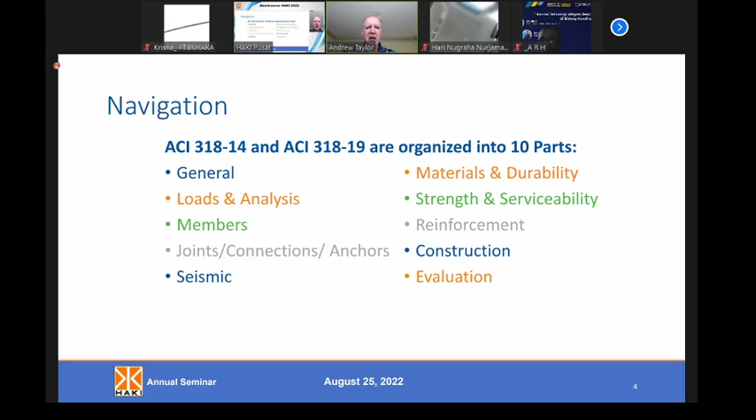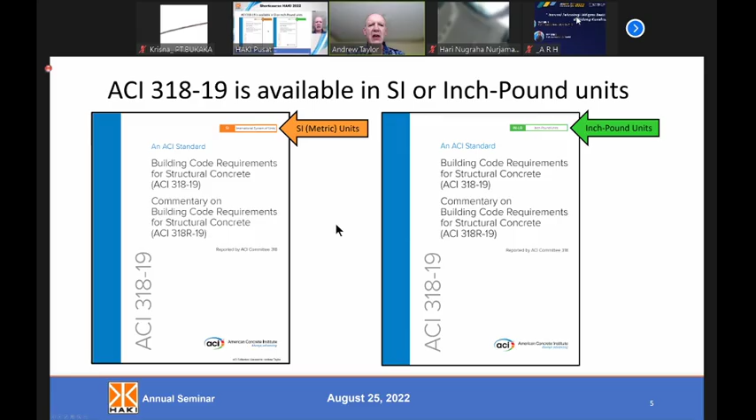Now, I want to point out also that there are several editions of the code available, including one in SI units, which is the one that I'm assuming that you would be using. The one on the right is the inch-pound units version, the one that I use most. You can see the difference here is shown in the upper right corner, inch pounds versus SI. There are also editions of the code in Spanish, Chinese, and I believe one or two other languages. But most importantly, the slides that I'm showing you today are mainly listed in the American units or inch-pound units.

However, I have attempted to translate those units at key points within this presentation into SI units. For instance, I've converted kilopounds per square inch, or KSI, into megapascals. I've converted forces into newtons, and so on. So hopefully you'll be able to follow along in familiar units. And I've listed also here, just for your convenience, the conversion factors if you wish to convert anything from the inch-pound version to the SI version.

One factor I find very interesting is the very last one, pounds per square inch times 0.006895 is megapascals. And I wanted to note that that is the famous number associated with the secret agent James Bond, 0.007. So remember that number if you're ever converting from pounds per square inch to megapascals.

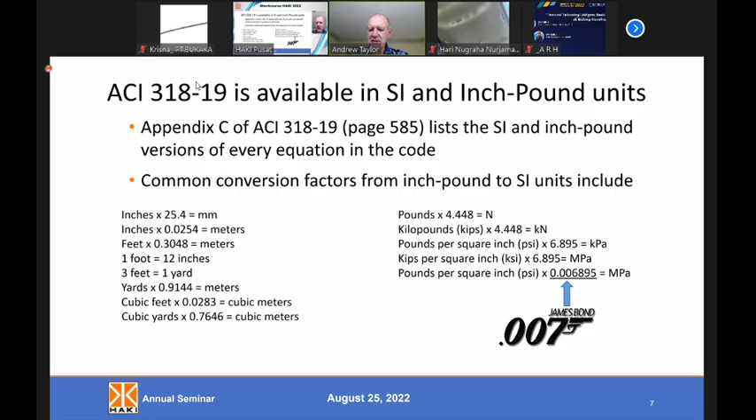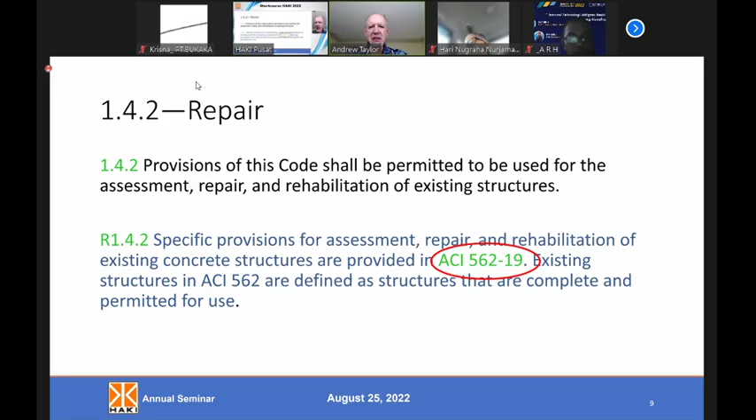All right, let's get started on the actual contents of the code. When it comes to repairing existing buildings, those that have been damaged or deteriorated, the code refers to the document ACI 562, which is a repair and rehabilitation code. It's a very comprehensive and helpful code. So if you are encountering a situation where you need to repair an existing structure, please refer to that code. But we also say in ACI 318 that the provisions for new construction or new design can be used when repairing an existing structure. So if you're using ACI 562, you will also refer back to ACI 318, which is what we're talking about today.

So I'll skip way to the end of the code. The very last chapter is Chapter 27, and its topic is the strength evaluation of existing structures. This applies when a structure is completed and hasn't been occupied yet. However, there may be some question about the strength of the structure, and this often happens if, for instance, a concrete

Test, strength test, comes in that's too low. So it may be necessary in some cases to evaluate the strength of an existing structure in order to certify it for occupancy. Now, what is generally well understood by engineers is to look at the structure in question, if perhaps the concrete strength is lower than expected, and perform calculations to evaluate that structure. I think many of us understand how to do that and to see if the lower strength is perhaps acceptable.

But what is not well understood generally is the procedure for actually performing a load test on the structure in the field. This load can be applied in a number of different ways: with heavy blocks, with tanks of water, with hydraulic jacks, a number of ways. But there are two test procedures described in Chapter 27.

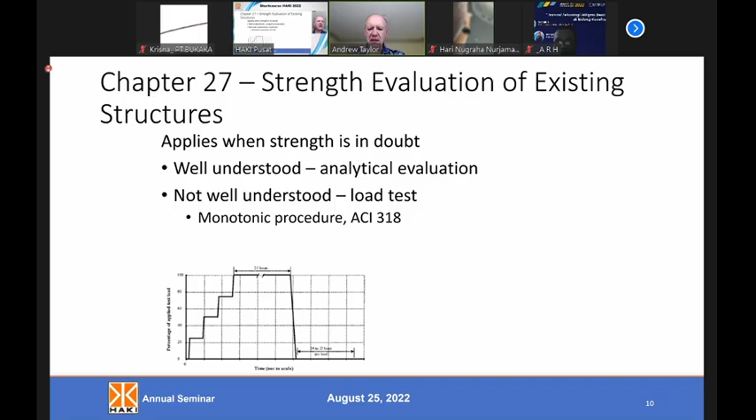All right, now we're going to go back to some of the more fundamental aspects of design that are covered in ACI 318. I want to point out something which is actually not new in the code, but it's very important, so I want to bring it up. In previous years, previous editions of the ACI code, let's say ACI 318-08,

2008, the loads in that code were based on a US document called ASCE 7-05. In that code, the wind loads specified in ASCE 7-05 are not factored, meaning when one is creating the load combinations for design, you have to multiply the wind load from ASCE 7 by 1.6. So it's a factored load in that case.

Now, what has happened since then, not new, but in the last 3 editions of the ASCE 7 load document, is that document has changed from service level loads to strength level loads. And the load factor used in load combinations is 1.0. So the wind loads as presented in ASCE 7 now are already factored. So it's a very important distinction to be aware of for wind loading, because the difference is a factor of 60% for wind loads.

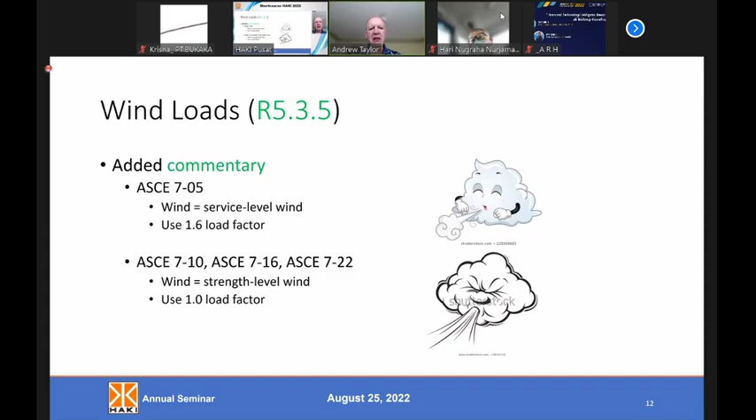So if you follow current practice and use factored loads in your design, whether they're from ASCE 7 or some other document, as long as they are considered strength level wind loads, then the load combinations in ACI 318 are correct. Okay, just a very important point about wind loading.

Another aspect of concrete design that I'm involved with quite a lot is the vibration of floors, either for sensitive occupancies like medical MRI machines or electron microscopes, or for human comfort, such as in apartment buildings, offices, and so on, where occasionally floor vibrations can be a problem.

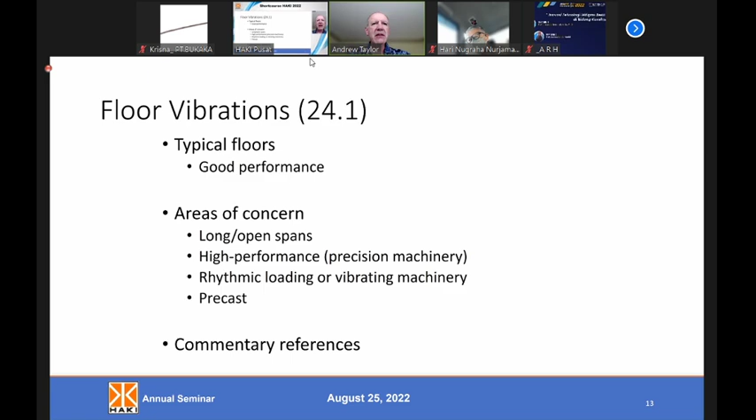Now, generally, concrete floors perform quite well from a vibration standpoint, and typically we don't have issues with them. However, there are cases, for instance, long spans, very high precision machinery, or where there's a rhythmic loading, such as an exercise studio or vibrating machinery, and sometimes precast concrete elements can exhibit vibration that is not acceptable in a particular situation. So in the commentary to ACI 318, there are references for procedures and methods that can be used to evaluate floor vibrations. I want to point that out because occasionally that is something that just about every consulting engineer needs to deal with.

All right, now we're going to talk about types of members, meaning slabs, beams, walls, and so on. The first type of member we're going to talk about is one-way slabs. So these are slabs that flex in one direction rather than in two directions. And of course, they're the simplest type of slab.

With this type of slab, the one-way bending slab, we are concerned with all structural systems, but in particular about the potential for collapse under extreme loads that we don't even consider in design. We would like to preserve the structural integrity of these slabs so that they remain in place. They may be severely damaged, but they will have a good chance of not collapsing, because collapse of one element causes loads on adjacent elements. So we want to preserve this structure in its original configuration, even though it may be severely damaged.

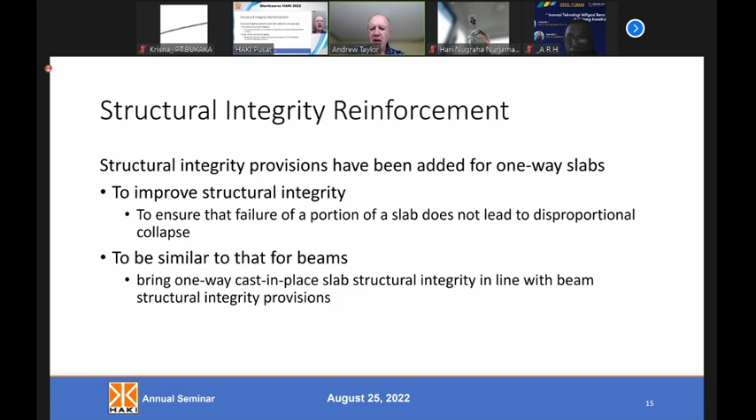So there are new provisions in the ACI 318 code to provide very minimal, inexpensive, continuous reinforcement in one-way slabs, to provide a high degree of confidence that they will remain in place if subjected to some very extreme loading not anticipated in the original design loads. So that's what's new about one-way slabs. Not much has changed, except for those new provisions for integrity reinforcement.

Regarding two-way slabs, you may be interested to see that two of the methods that have been in the code for a very long time - maybe 50 to 80 years - the direct design method and the equivalent frame method from ACI 318.14, have been removed. This is not because there's anything wrong with those methods; they are completely valid. It's just that they are not used very often. Most of the time they're used primarily for preliminary sizing, but not for final design. We looked at those, and we are trying to save paper when we print the code.

So what we did was take those methods out, but we left references in the code that say, for instance in section 8.2.1, that the direct design method or the equivalent frame method, which have been removed, are still valid - you just have to refer back to ACI 318.14 for the rules on how to use them. They aren't eliminated; they are just not printed in the current edition of the code, because in practice they weren't being used very often, but there's nothing wrong with them. That same provision appears in section 6.2.4.1, so those methods are still available.

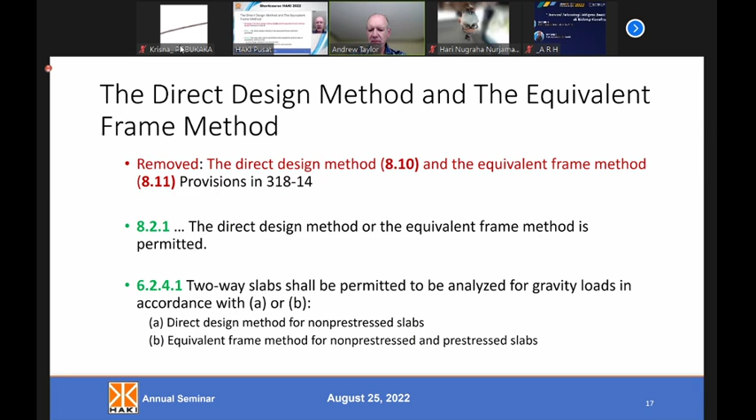Here's a very important one, especially if you're doing commercial design of multi-story buildings. We all know that mechanical engineers want to put holes at the worst possible locations in the structures we design - right next to columns. They want to put holes through the slabs where pipes and conduits come down next to the columns. So there are rules in ACI 318 about how to evaluate the punching shear strength of a slab intersecting a column. A very common form of construction is flat slabs without any drop panels or shear caps, just a flat slab intersecting a column.

In order to evaluate punching shear strength, we need to account for those openings. In the illustrations, it describes how this is done for various situations and shapes of holes, and how to evaluate the green dashed line, which is the perimeter of the punching shear zone.

A big change is that previously in ACI 318.14, the distance from the column within which an opening could be located without affecting the punching shear strength of the column was 10 times H, where H is the thickness of the slab. That created more situations where it was harder to design for openings like those shown. That has been revised to 4H, so it's much smaller - openings can be no closer than 4H from the column and they won't count against the punching shear strength. This is a significant change, and I think it makes life easier for engineers designing flat plate structures.

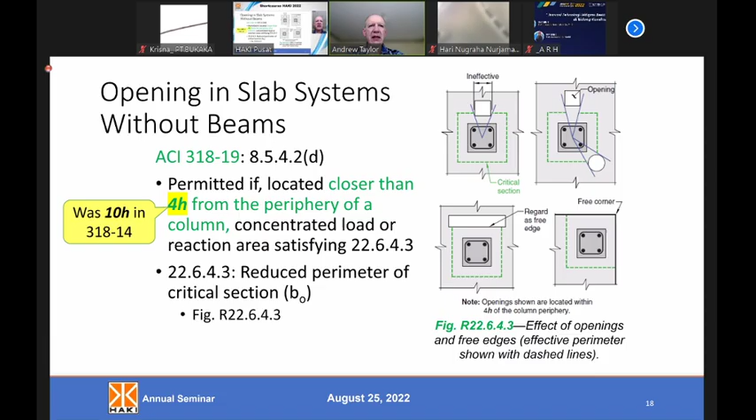The crack did not intersect the top reinforcement that was there partially for preventing punching shear. But this only occurs under the ACI design rules for very thick slabs, and so the rules have been changed slightly to prevent this situation occurring.

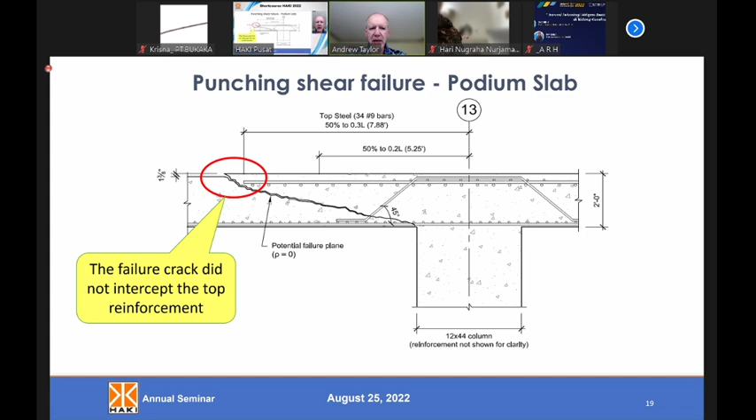So this is a new rule. If you're dealing with a very thick slab and concerned about punching shear, make sure you evaluate the extension of those bars and that they meet the 5D extension rule.

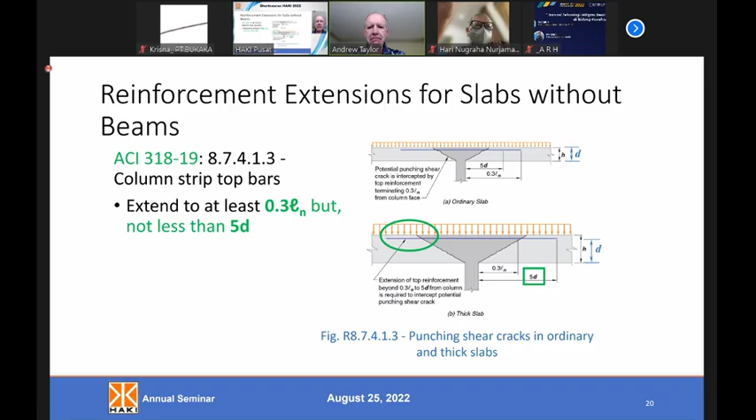Okay, now post-tensioning. This is a method that is widely used, particularly in the Western United States, not as much in the Eastern US. I'm sure that in your career you will encounter it - you may commonly work with it, or it may be less common in the kind of work you do. But there are a few changes there.

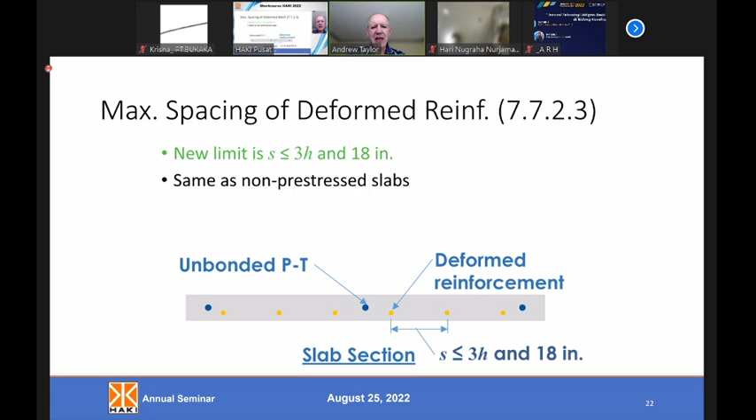There is a new requirement for the spacing of non-pre-stressed reinforcement - the normal deformed bars that are in the slab. That spacing, which is not the spacing of the post-tensioning tendon but of the normal deformed reinforcement, has been reduced and is now the same as for non-pre-stressed or normally reinforced slabs. So things have been simplified a little - the maximum spacing of deformed bars in pre-stressed slabs is now the same as for non-pre-stressed slabs.

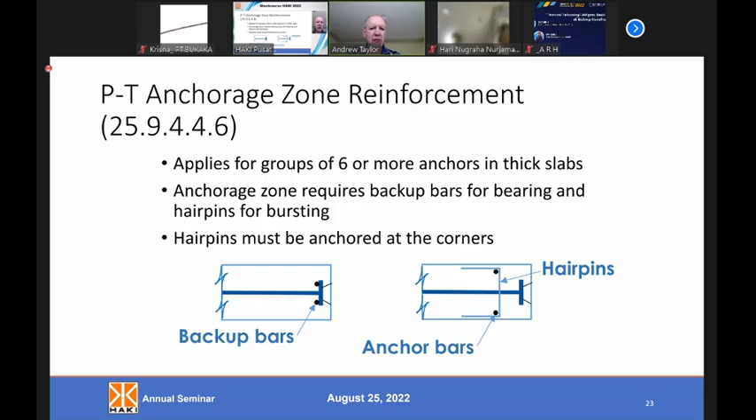Now why are we requiring these bars? It's been found that the slab can split under the pressure or force of the post-tensioning tendons if there's insufficient reinforcement to inhibit this splitting and bursting of the edge of the slab. So these are new rules. If you're involved with this kind of construction, I'd recommend you review the rules for these backup bars, anchor bars, and hairpin bars.

Okay, now walls. What I'll be talking about here are not seismic shear walls, but non-seismic walls, and there's a few changes. One is that cantilever retaining walls - there's a few illustrations of loads on cantilevered earth retaining walls - are now moved into chapter 13, or designed according to chapter 13. Now you might wonder why - they're a wall, they were in the wall chapter, chapter 11, and now they've been referred to chapter 13, foundations.

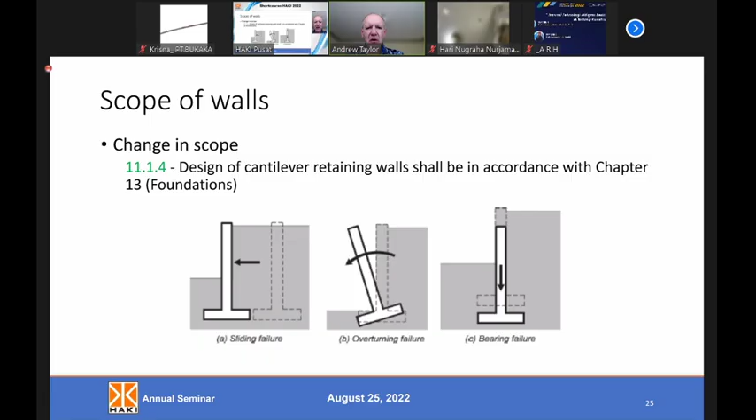What we found is that in 318-14, there was some confusion about the reinforcement of retaining walls.

Specifically, there were rules about a portion of the reinforcement that had to be on one face of the wall and the portion that had to be on the other. They weren't very clear, they weren't very well understood. The definition of interior face and exterior face was not very clear. And we found that there really was not a strong technical basis for the 1/2, 2/3 rule.

So now the rule is that there are 2 layers of bars near each face. It doesn't specify what the proportions are, as long as the calculations work for strength. There is one exception for walls greater than 10 inches thick, about 250 millimeters, and that is for single-story basement walls. Generally these are found, at least in the US, in residences, so 1 story below ground. Those do not require 2 layers of reinforcement, but all other walls greater than 250 millimeters require 2 layers of reinforcement.

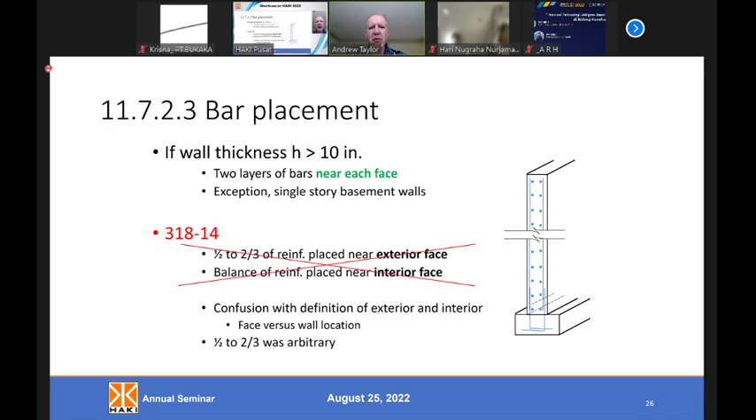Now let's talk about foundations. There are some really significant changes about foundations that I want to go over.

As I mentioned, we moved the cantilevering wall provisions or design rules into the foundations chapter, and there have been many changes in the sections on the design of deep foundations. So what are deep foundations? Those are piles, drilled piers, drilled shafts, cased shafts, both cast in place and driven piles. They're all types of foundations used in soft soil conditions. I'll describe why those have changed in a moment. But I also want to note there have been small changes in the minimum concrete strength required for different types of foundations, and also a change in the concrete cover requirement, meaning the thickness of concrete covering the reinforcement.

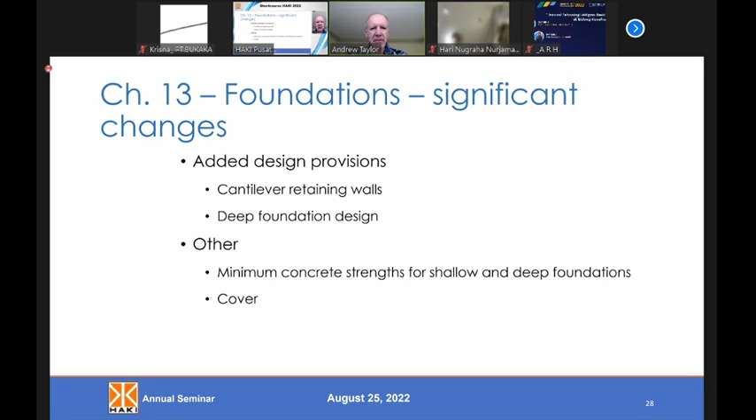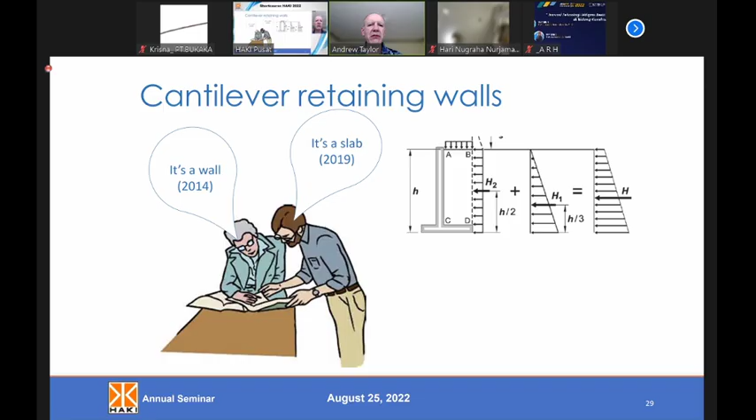So first of all, cantilever retaining walls. In 2014, the code described cantilever retaining walls as walls and said they should be designed as walls. In 2019, we had a philosophical change so that these cantilever retaining walls are actually designed according to the rules for a concrete slab. We believe they perform better, are more economical, and it makes more sense to design them according to the rules for concrete slabs rather than walls.

I won't go into all the details, but if you look on this chart, you will see that if we design cantilever retaining walls as a slab, as a one-way slab, then the rules for design get much simpler. In general, that results in a more economical design because it's a little more reinforcement, but it's the same in both the vertical and horizontal directions, so it's much easier to put into place. It also avoids having the wrong reinforcement put vertically versus horizontal in the field. They're the same. So this chart outlines the differences between 318-14 and 19.

If you're interested in that, you can refer to the sections shown there. I think you'll find it is an improvement over the last edition of the code.

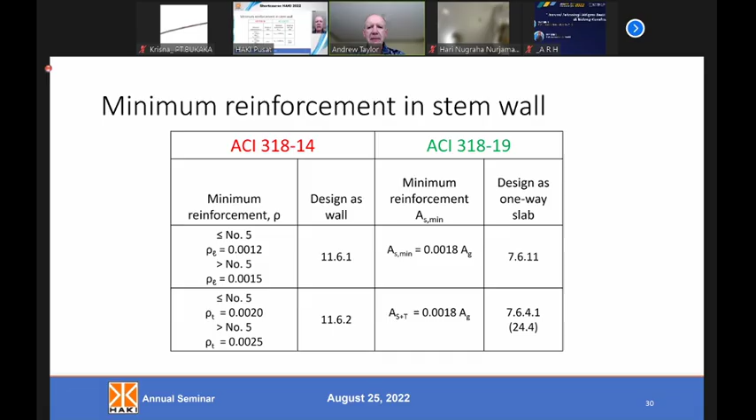Now, regarding deep foundations, I said I would explain why there have been changes in all these different types of foundation provisions. The ACI code mainly addresses deep foundation design for earthquake-resistant structures. In the US, earthquake-resistant structures are designed according to a seismic design category, SDC, with category A being virtually no earthquake considerations for design, and categories D, E, and F being the most severe earthquake conditions for design. ACI 318 addresses deep foundation design for seismic conditions in these higher seismic zones, or design categories C, D, E, and F.

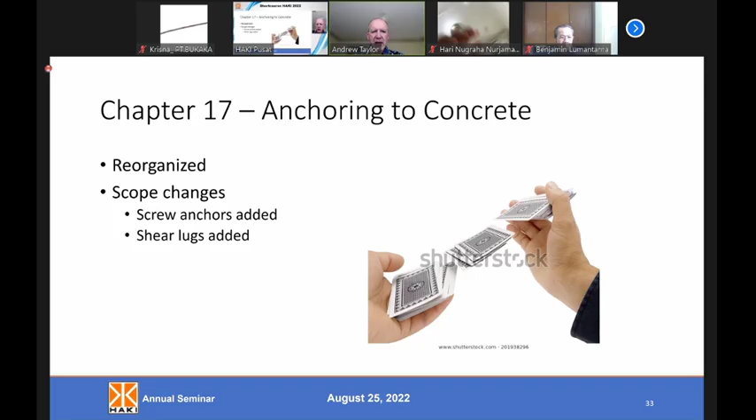So now there are rules in ACI 318 about how to design shear lugs. We've kind of gained more confidence in how to design and what the shear capacity of column base plates with shear lugs are.

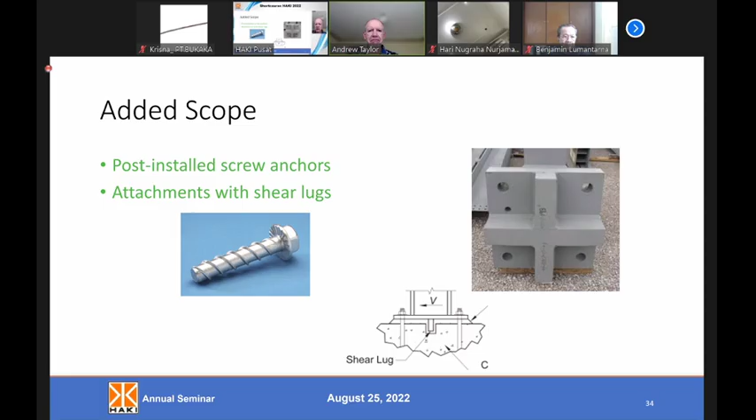Okay, now seismic, a very important topic. I have been involved in seismic design for more than 30 years now, and it never gets old. It's always changing. There's always new things to discover.

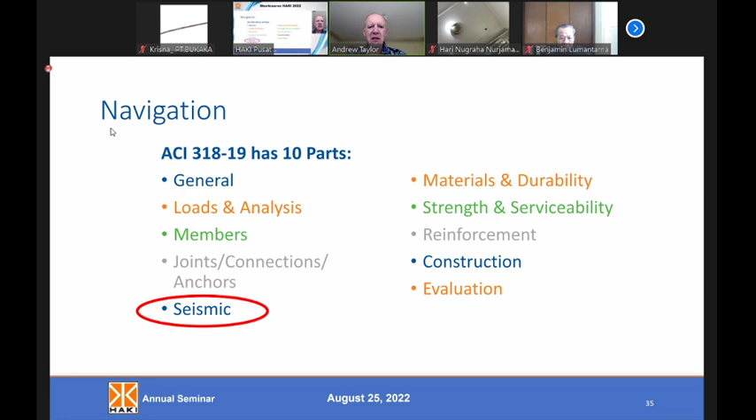In the 318-19 code, we have made some changes in the seismic design provisions. If you would like a complete and very detailed tour of all of these seismic updates, I suggest you find 2 articles in Concrete International. They were published last year in March and April. S.K. Ghosh and I wrote those together. They cover just about every detailed aspect of the changes to seismic design that occurred in the 2019 code. So I invite you to look at those, but I'm going to point out some of the changes that are most important in this presentation.

Perhaps one of the biggest and most important changes is that higher strength reinforcement is now permitted in seismic design. Previously, we had grade 60 reinforcement, which is 420 megapascal reinforcement, permitted for ductile seismic design, for flexural elements, and for shear.

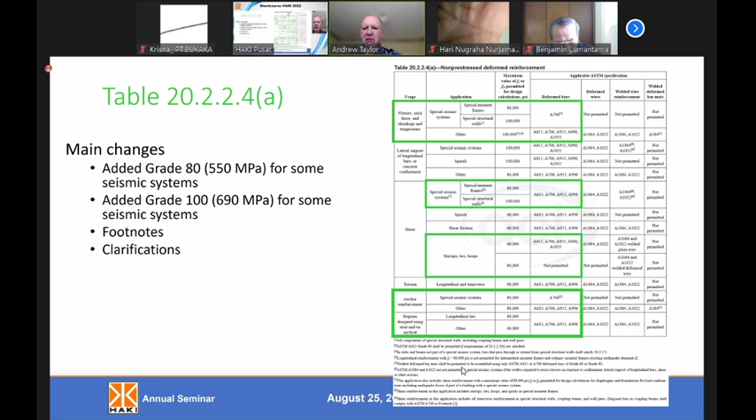Now let's talk about seismic design of some specific earthquake force resisting systems. A lot of the changes have to do with the availability now of higher strength reinforcement for design. And what I've done is on these next few slides, I've shown where in the green box, where the new availability of steel grades is permitting you to use a different type of bar. So new in 2019 is using grade 80 or 550 megapascal reinforcement, in this case for flexural reinforcements in special moment frame beams. So anything in green on these slides is new in 2019.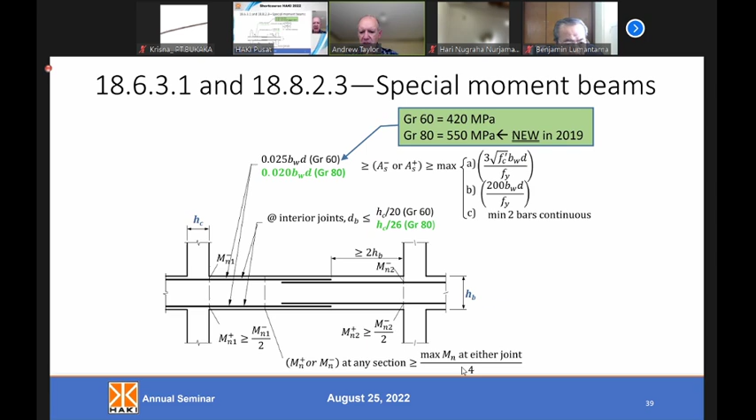So I won't go into the detail here, but as you can see, as I go to some of these other illustrations, you see that for instance, the shear reinforcement now can be a higher grade, but also notice that the spacing of the reinforcement is reduced for the shear reinforcement to a smaller spacing, and there's a couple technical reasons for that, but it mainly has to do with the tendency of bars, especially in seismic applications, to buckle laterally between the points of support, which in this case are the shear reinforcement, the hoops, in special moment frame beams.

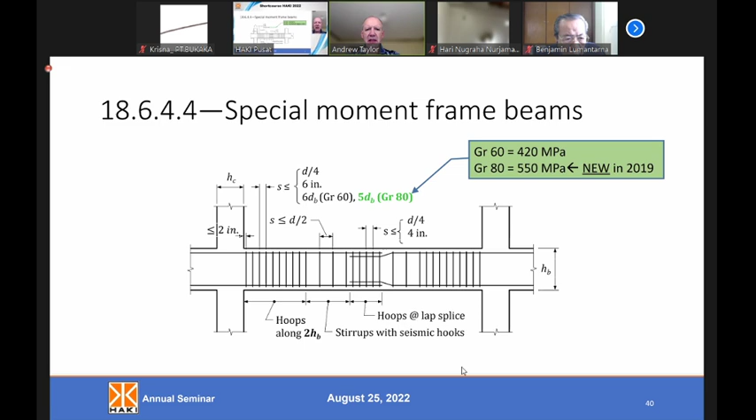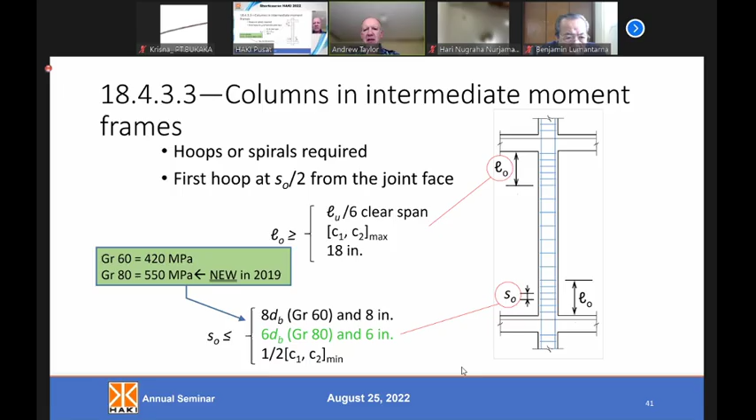So just be aware, if you're using the higher grade reinforcement in certain applications, sometimes the spacing has changed, decreased slightly. We see here that, again, there's a spacing change if you're using 550 megapascal hoops in intermediate moment frames in this example. If we look then at columns in special moment frames, again, you can use the higher grade reinforcement, but the spacing has changed, has decreased slightly for the higher grade.

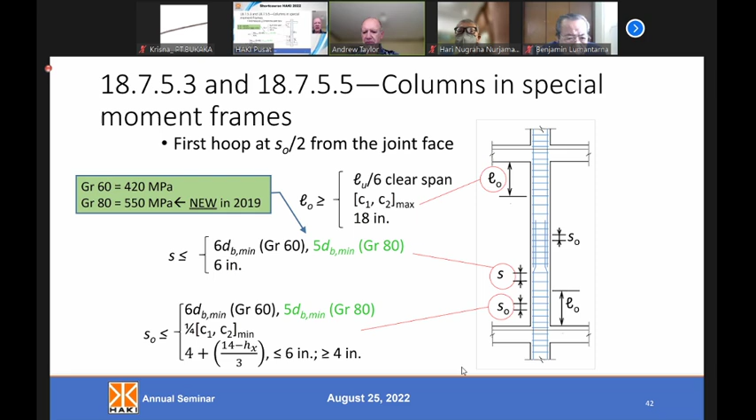And then we get to special structural walls. Now, this is probably where the most significant changes have occurred, and I'll try to cover the main points so that you understand what has changed in 2019 with special structural concrete shear walls for seismic. Here is a brief summary of the changes in shear walls, special structural walls, and I'll describe each of these briefly, but in subsequent slides.

But the cutoff or the stopping of longitudinal bars, the rules have changed, I think, for the better. Reinforcement ratios at the ends of the walls have been changed somewhat. It probably won't affect in practice too much. It won't affect too many buildings. The shear demand is a very significant change that I'll be spending some time on. That is, the shear load that is required to be resisted by the walls has changed. There is a new drift capacity check, which again, probably not influence the design of walls very much.

There are very significant changes in the detailing requirements, the hoops and cross ties in the special boundary elements at the ends of special walls. And there is a new section on ductile coupled walls. So I'll go through all of these briefly in the following slides.

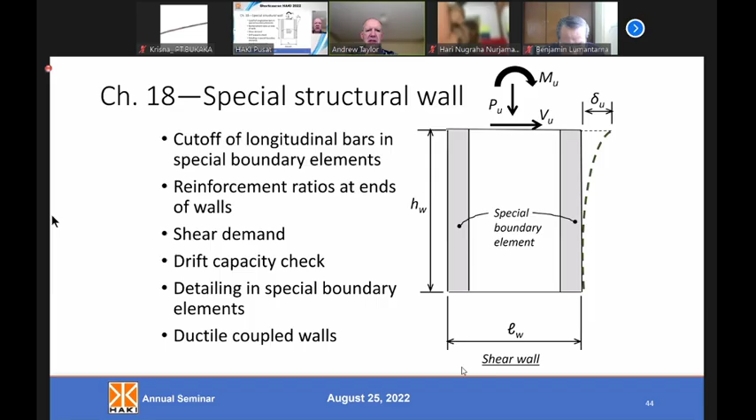So previously in 2014, if you had a vertical bar in a shear wall, and you got to a certain height in the building where you no longer needed that bar because the flexural demands have decreased as you go higher in the building, and you want to stop that bar, you had to, under the old rules, extend that bar 0.8 times the horizontal length of the wall. So if you had, for example, a 10-meter long wall, which is fairly common in the US on the West Coast, if your shear wall was 10 meters wide this way, and you needed to stop a bar, you couldn't stop it where you no longer needed it.

You needed to extend it 8 meters beyond that point. 8 meters is more than, or about 2 stories typically. So what was required was to extend these bars 2 stories above where they're needed, which in some cases is really excessive, and there wasn't a really solid technical reason to do that.

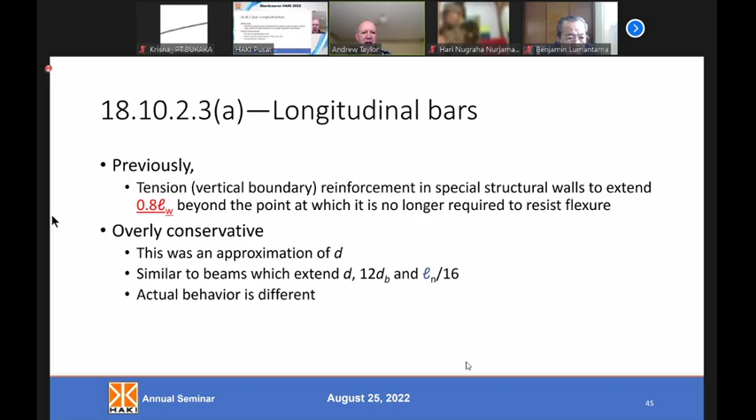So we had a lot of debate about that provision, and the new rule is illustrated here. Once you find the point at which a bar is no longer needed, you need to extend it at least 12 feet, or a little less than 4 meters, about 3.8 meters above the point that it's last needed, which is much, much easier to build.

However, if that 3.8 meter extension went above the next floor, then you only need to go L sub D, one tension development length above the next floor, so it could be significantly shorter than 12 feet. This is a big change from the 0.8 times the length of the wall extension that was required, and it took a lot of debate, discussion and voting to get this change through.

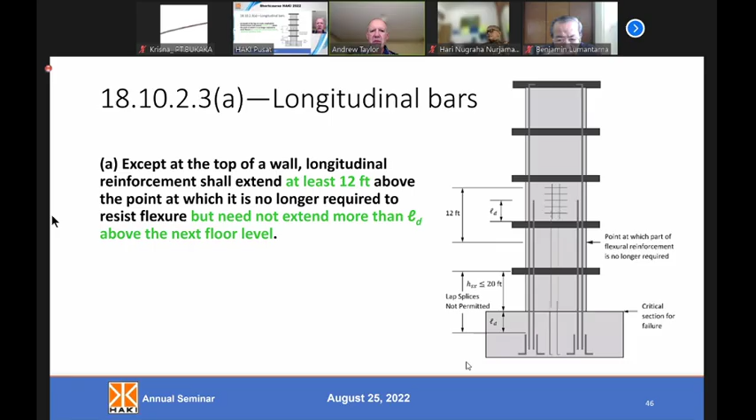Okay, moving on to a different topic about walls. There is a new provision, which I have to say is a little bit controversial, regarding the location of lap splices. Lap splices are where 2 bars are joined by overlapping them like this.

Unfortunately, lap splices at that location are the simplest way to construct those walls. Obviously, you have short bars coming out of the foundation, and then you continue to build the wall above, and that's the easiest way to do it.

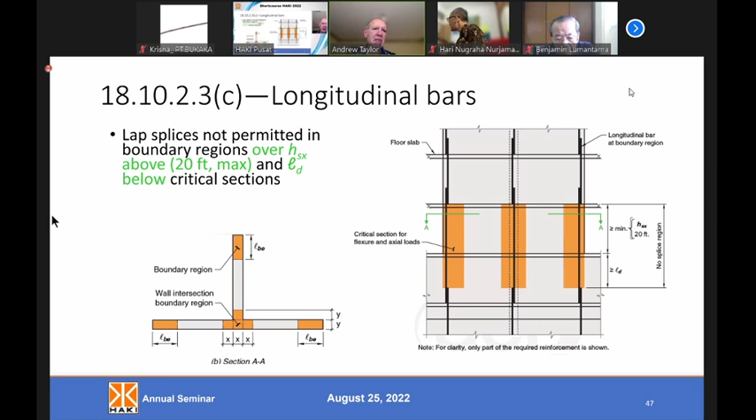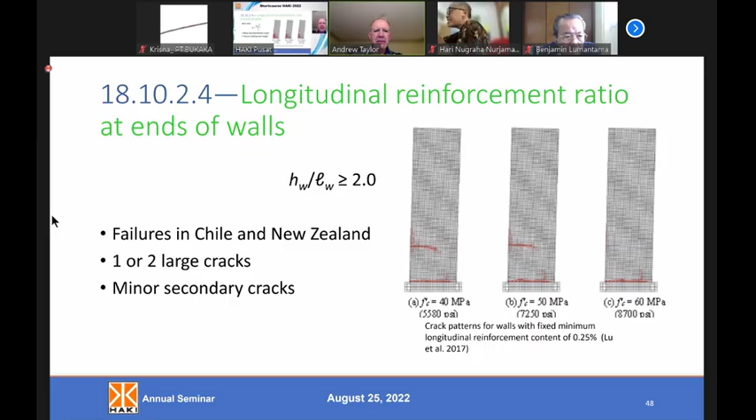So by adding a little more reinforcement in the ends of the walls, we end up with a situation as illustrated here, where there are many small horizontal cracks. The inelastic strain in the vertical or longitudinal bars is distributed well over the height of the wall, and there's less possibility of a strain concentration and a fracture. So immediately you're wondering, well, how much more reinforcement do I need to put in the ends of the walls? There's almost no room in there as it is under the current ACI provisions. Well, this new ratio is 6 times the square root of F prime C over Fy.

I think it's actually different for SI units. This is in inch-pound units. I forgot to mention, in both the SI and inch-pound units of the code, there is a table in Appendix C that shows every equation in the code in both inch-pound units and SI units.

So if you're ever looking at an inch-pound equation and you want to know how to evaluate that expression in SI units, look in Appendix C and you'll find it there. For instance, there's a different equation for this rho for SI units.

In any case, this amount of reinforcement needs to be near the ends of the walls. And that results in this much better behavior as illustrated here. Now, let me back up, I'm sorry.

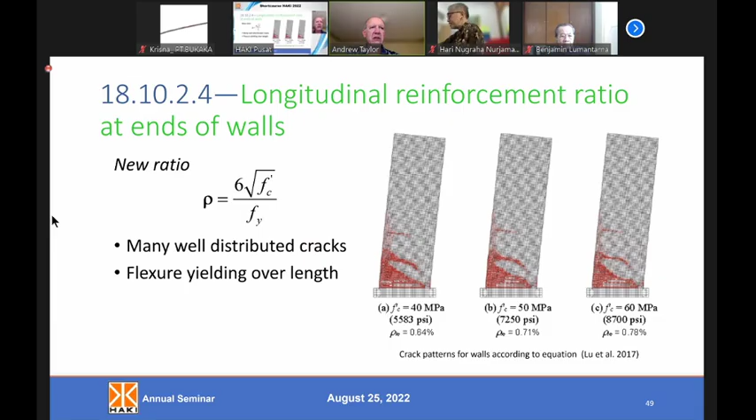You will find, if you're designing walls with this new rule, that in most cases, it doesn't change the amount of reinforcement. If it does change the amount of reinforcement, it's by a small amount. So this is not a big impact. It's just designed to try to improve ductile behavior of walls in a few situations.

All right, another really big change is this shear amplification. So just a little bit of background on this, particularly for tall buildings. By that, I mean 15 stories or taller, maybe up to 50 or more stories.

In the US, we design those tall buildings, of course, according to the code, but we also generally require in the Western US a review by another engineer called peer review, to evaluate our analysis methods. And I think it's a good system. It provides very consistent levels of design.

But when we do that kind of design, it is pretty much universal practice to perform a nonlinear time history or response history analysis. So we model the structure, this tall structure, we subject it to the accelerations of an actual or recorded earthquake, and we evaluate the response, particularly the inelastic behavior.

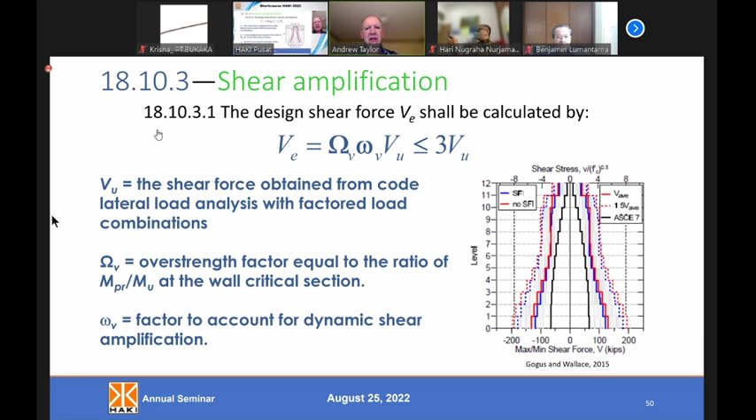So we know, because we've accounted for these effects already in our designs for the last 20 years or so, that we have included this effect, but now we're putting this effect into the code to make sure that it's considered in all designs.

Here is the way of calculating large omega sub V, the overstrength factor. It has to do with the strength of concrete and reinforcement being greater than what is specified. And that factor can be...

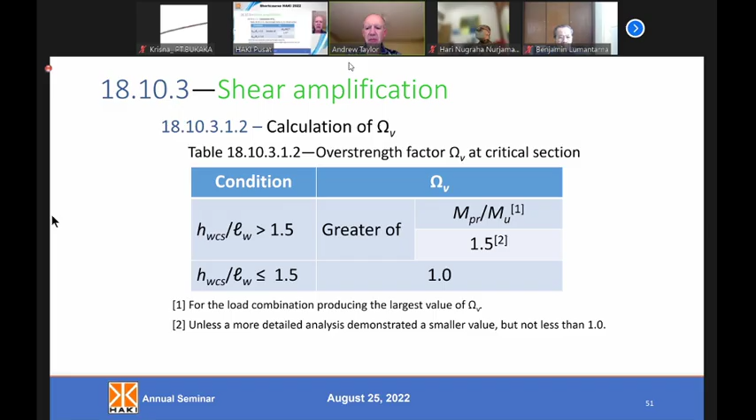1.5, depending on the height of the wall divided by the length of the wall. That factor is 1 or greater, depending on the slenderness of the wall, the applied load, and the plastic hinge moment. The small omega sub v is really height dependent, and n sub s is the number of stories. We see that for taller buildings, this factor increases.

It begins at 1.0 and increases as high as 1.8. But once you multiply large omega and small omega together, the combination does not have to be greater than 3. I want to point out that this equation is in inch-pound units.

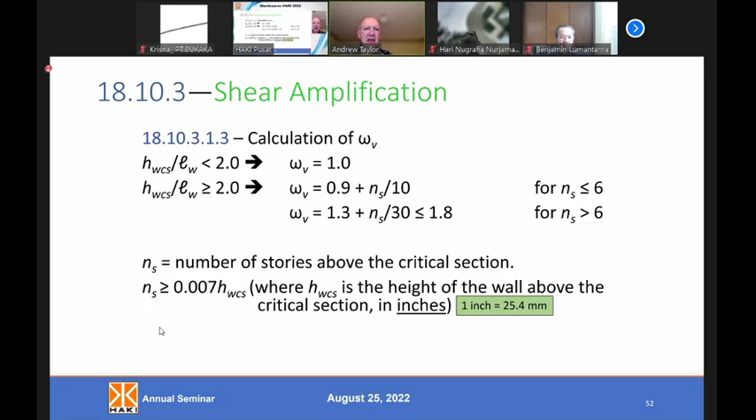This n sub s is greater than or equal to 0.007 h sub WCS, the height of the wall above the critical section you're designing for, in inches. You need to use the appropriate equation for SI units if you're evaluating that equation.

Okay. This next provision related to walls is presented here as a deformation demand check—a check that your wall can deform adequately and not exhibit bad behavior when called upon to bend in an earthquake.

What it really affects is the wall thickness. It's a check to make sure the wall is thick enough that it doesn't buckle out of plane, that is, buckle sideways, when subjected to high seismic loads that also cause inelastic action. In equation 2, the lowercase b is the thickness of the wall. The simple check to make sure the wall is thick enough to prevent this out-of-plane failure is shown in equation 2.

That's a conservative check, meaning you might get a thinner wall if you follow the second or third expression, number 3. However, there are some parameters in expression 3 which you don't know before you complete design of the wall. So to use equation 3, it's an iterative process—you have to go around.

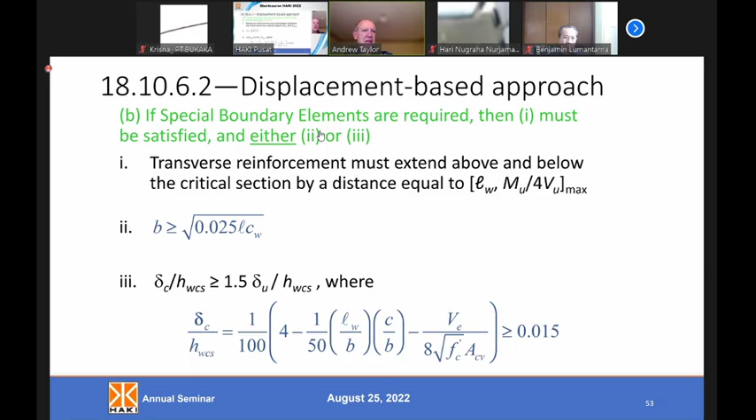We provided equation 2 so that in preliminary design, and even final design, you can just establish the minimum wall thickness without worrying about iterating through the length of the wall, the seismic demands V sub E, the area of concrete A sub CV, and so on. For preliminary sizing and even final design, you can use the minimum wall thickness check shown in item 2.

There have been some other changes in the detailing requirements for special walls, which are important and, again, controversial. There was not uniform agreement in the committees, the seismic subcommittee and the main committee, on whether these requirements were needed. But through the consensus process, voting, revision, and debate, we developed the detailing provisions I'm about to show you. You will see they increase the difficulty of construction significantly.

That's why these are even now currently in debate within ACI 318. We may issue clarification of these provisions that could make them a little easier to comply with. But I'll show you what they are now as published in ACI 318-19. If there is a revision or clarification, I'm guessing it will come out within the next 6 months, but I can't be certain. We're working on that though.

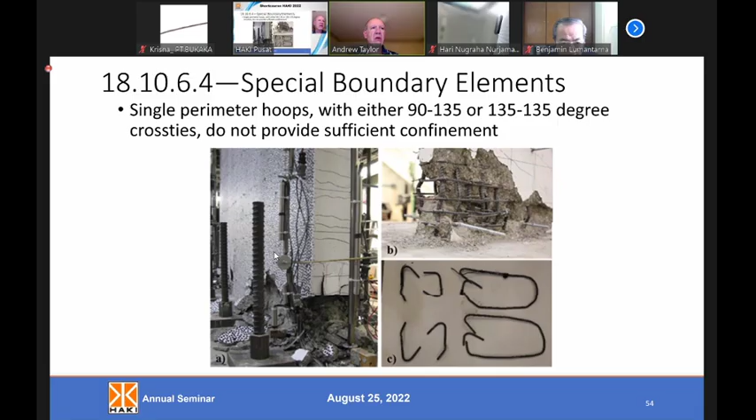Okay, so what are these provisions? All of the bars within the special boundary zone, shown in the gray area, all the vertical bars have to be enclosed by either a 135-degree seismic hook or a 90-degree bend. Every black circle is enclosed or constrained by either a 90-degree corner or a 135-degree hook. This is different from 318-14, where, for instance, the orange-colored bars shown there were permitted to use a 90-degree hook on one end and a 135-degree hook on the other end.

This made construction not easy, but possible. Putting 135-degree hooks on both ends of cross ties definitely makes life more difficult for a contractor.

I won't comment any further on that, other than to say we are evaluating these requirements now. It's very difficult to build this way.

The other requirement is that there be closed hoops no longer than 2 times the thickness of the wall, and that when those closed hoops are installed, they overlap as shown here. There's a blue closed hoop on the left and a black closed hoop on the right.

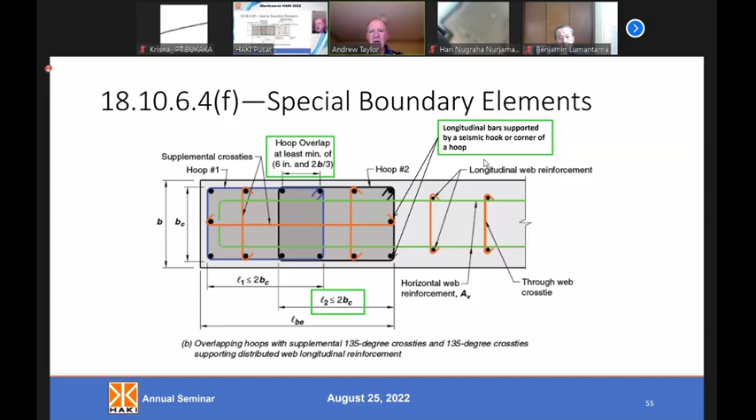Again, these are difficult to install. Sure, there may be some inventive entrepreneur out there who's going to figure out how to do this. But I'm sorry to be the messenger of a more difficult method of construction — the test data from laboratory tests indicated that to get sufficient confinement of the concrete at the ends of walls, this needed to be the case. So it's an ongoing topic of discussion, though.

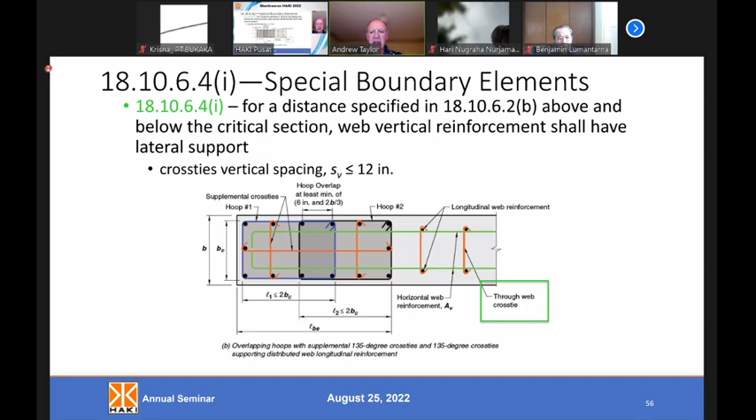Yeah, so I already described this — this is the orange bars on the right. So I've described all the changes there in reinforcement detailing for special structural walls.

But they have never been defined in the code. They're a very common and popular type of shear wall that has never been defined. We all know what it is, but there's no official definition.

So we now have an official definition of a ductile coupled shear wall. It's given in the code in section 18.10.9, and it has to do with the height-to-length ratio of the wall being greater than 2, along with the provision of coupling beams and their length-to-height ratio. Now you may ask, why is it important that we define what a ductile coupled wall is?

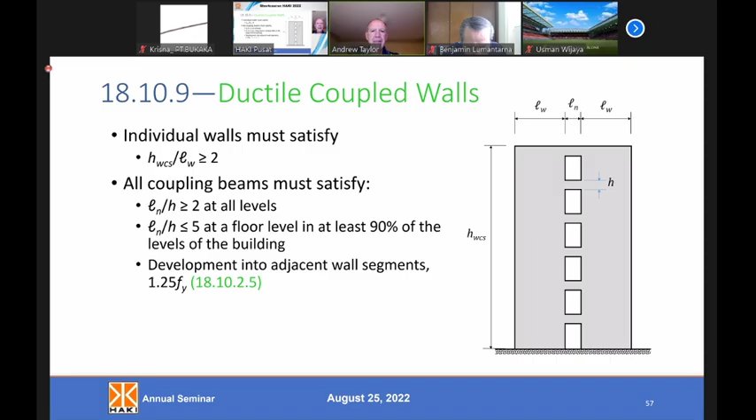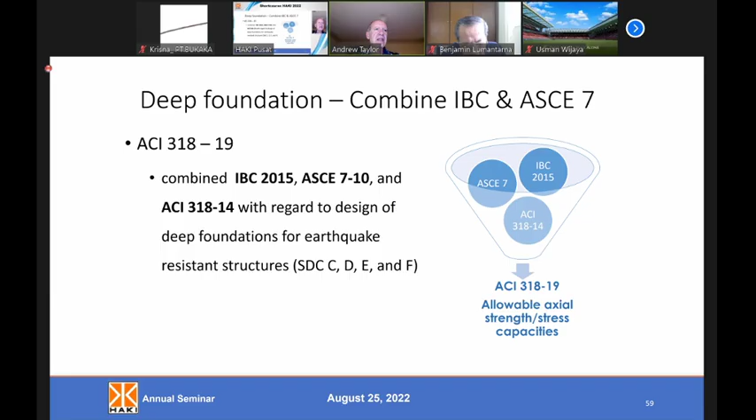Okay, now we're going to talk a little bit about seismic foundation issues. I already showed you this slide where I mentioned that we tried to combine all of the deep foundation seismic provisions for high seismic zones into one list of provisions in ACI 318-19. We didn't quite get there, but I think we will completely in the next version of the code.

What are deep foundations that are affected here? I've shown some examples: uncased or unenclosed, cast in place concrete drilled or augered piles. Metal cased concrete piles, so a pipe pile with concrete in the middle. Also, metal cased is slightly different from a concrete filled pipe pile, and precast concrete piles. I believe probably all of these foundation types are common in the areas where you work, so you may be interested in the revised seismic provisions in ACI 318 for these types of deep foundations.

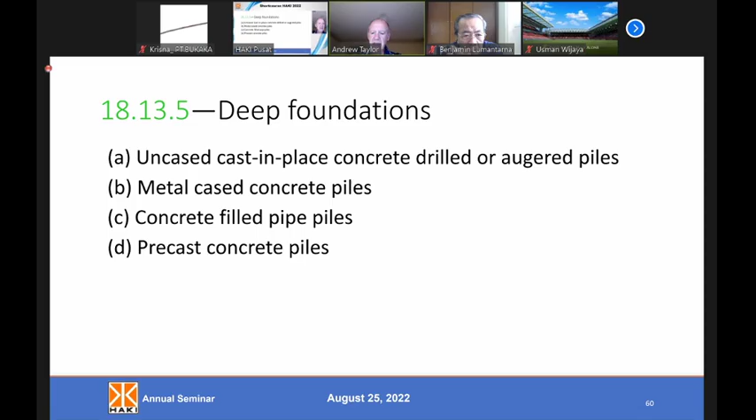But I did mention that we don't include in this presentation all of those changes because they're very numerous, and it's best if you just look at the particular type of deep foundation that you're considering.

Okay, we're getting near the end here. I wanted to talk briefly about what we might expect in the next edition of code, which will be 2025.

A big concern worldwide, as we all know, is the addition of carbon to the atmosphere. And unfortunately, the production of cement around the world contributes to a large percentage of the carbon in the atmosphere. This quotation is from a study in, I think, 2016. More recent studies estimate that the production of cement may be responsible for as much as 8% of the CO2 that's put in by people into the atmosphere every year. So it is a big problem.

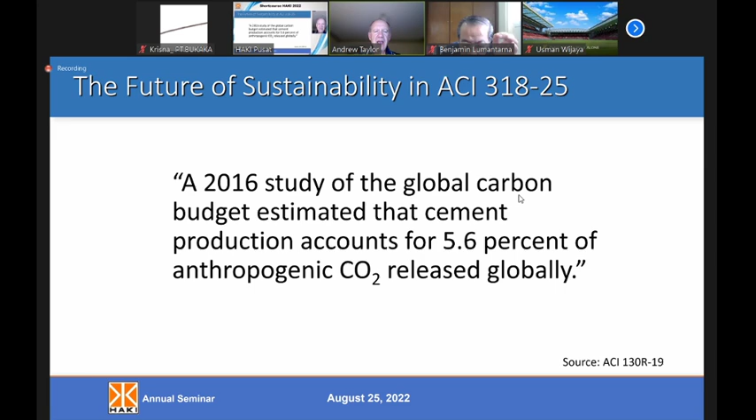And as engineers, we're smart people. We can perhaps have some influence on this. So what we did in preparing the 2025 edition of the code is we have created a special subcommittee called Sustainability. And that subcommittee is working on sustainability provisions for ACI 318-25.

And those provisions will go in an appendix. So an appendix of the code contains provisions that are optional. If you're working on a project and the owner, perhaps it's a government project or an owner that has particular objectives regarding environmental effects of construction, if your project has environmental or sustainability requirements, the project can use Appendix N as guidance for creating a more sustainable structure. They aren't requirements that are in the main part of the code, but they're optional and can be used.

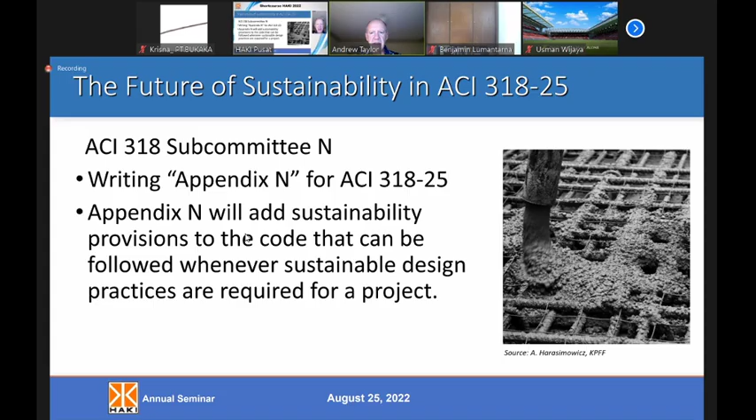So the subcommittee is working on this currently. This appendix will have a section that outlines the scope and purpose of the appendix, but more importantly, it will explain how the sustainability properties of a particular concrete mixture are to be determined. So what we need is, if we're going to compare concrete mixes with different ingredients, different amounts of cement, and so on, we need to compare them on a consistent basis.

That's what this section 2 defines, is how to evaluate the sustainability aspects of a particular concrete. And then similarly, there are ways to measure the overall sustainability impacts of an overall structural system. So a concrete system, maybe it's a precast system or a flat plate with column system, many possible different options. But if we're going to compare the environmental impacts between all these different systems, or even with wood systems or steel systems, this section will describe how to do that for concrete systems so that we're comparing everything on a consistent basis.

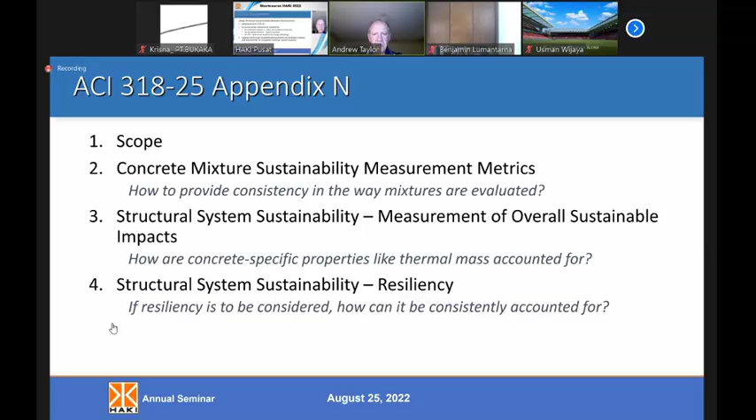There is another appendix, introduced in 318-19, about nonlinear response history analysis, the kind of analysis for seismic design I mentioned earlier. It is being updated. It was kind of an outline in its first version, but more detail is being added now, giving guidance and limitations on how this kind of analysis should be performed.

Chapter 17, for anchorage to concrete, has been around for a while, but there appears to be a philosophical mismatch between the requirements for an anchor designed according to chapter 17 and the requirements for an embedded reinforcing bar. If you look at them, they're basically doing the same thing—pulling out an anchor versus pulling out a bar—but we design them very differently. So there's a subcommittee working on trying to bring together the provisions to make them consistent between anchors and development of reinforcement. I don't know what it will ultimately produce, but it's working on that question now.

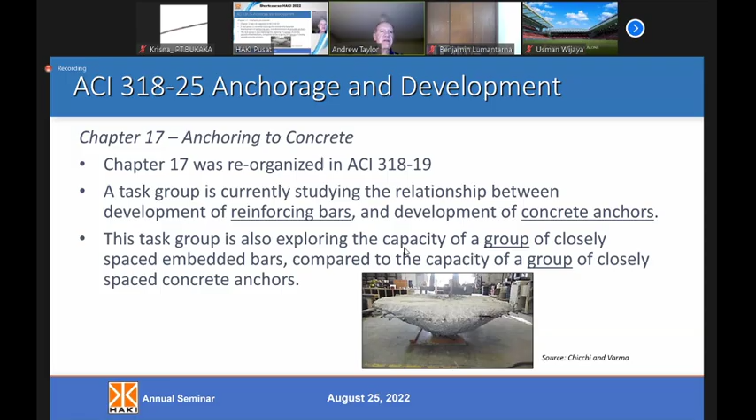Also, there's to be a new appendix on wind design called performance-based wind design. You may be familiar with performance-based seismic design, where you set certain performance goals and design to meet them. More recently in the US, the American Society of Civil Engineers has produced a pre-standard—not a standard, but a preview of a potential future standard—on performance-based design for wind loads as opposed to seismic loads. So ACI is supporting that by developing an appendix to provide guidance on performance-based wind design, which mainly applies to tall buildings.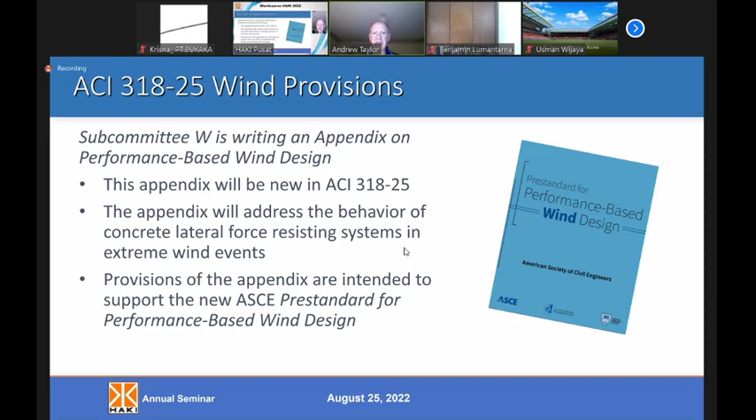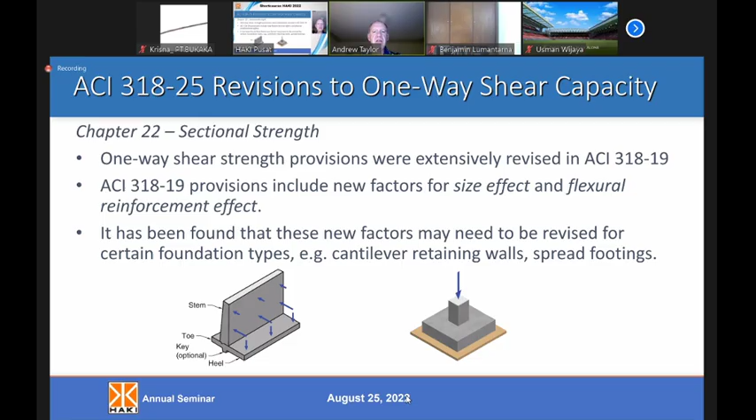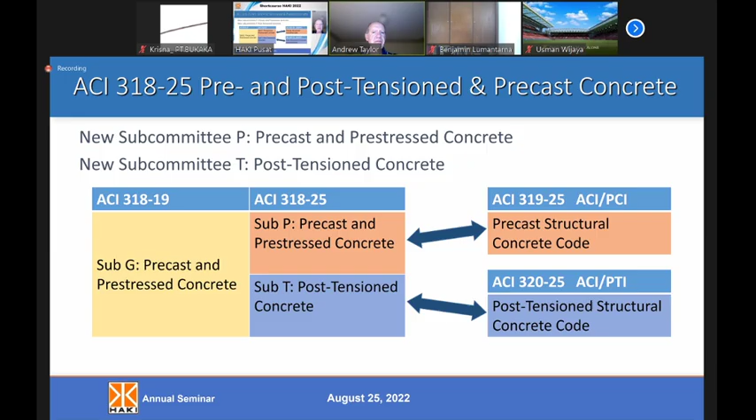And I've already talked about foundations—we're trying to improve that coordination for deep foundation. So here is the last slide. I talked about the potential for future developments and a main outline of the changes that will occur or have occurred in 2019 and what we might expect in 2025.

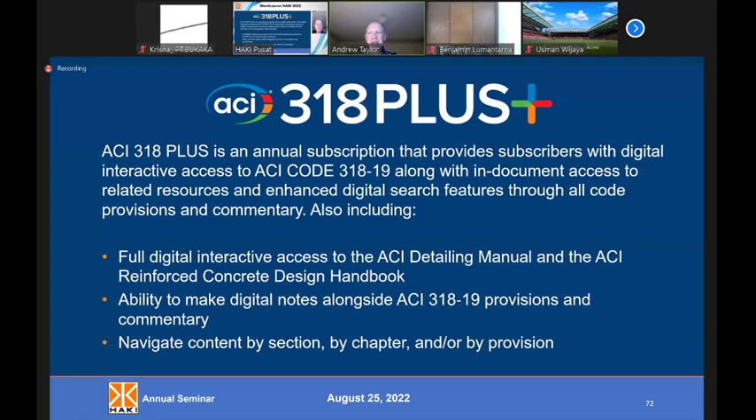Finally, I would like to just... finally, just to finish this off, I'd like to mention something that's just been released by ACI. This is a recording. That's a recording. And thank you for your time. So I recorded this presentation for another venue, and those two...

Anyway, I will just say that there's a version of ACI 318 that has been launched by ACI, called ACI 318 Plus. It's an electronic version, really useful because you can search for things—you can search for words. Like if you want to search for, let's say, 'hoop,' you can look and it will show you all the instances of hoop, and you can end up with a full understanding of everywhere hoop is mentioned, or 'composite'—you could look up the word composite or composite beams or whatever. So I'll just mention that.

And then finally, I'd like to thank you for your time. Hopefully I've helped you understand some of the most important changes in ACI 318-19 and what we might be looking at in 318-25. So I think I finished close to on time. Thank you very much.

Yes, so thank you, Dr. Andrew, for the very, very extensive presentation, although you said that there is actually a 6-hour version of it. Yes, that would be even more extensive. I'm sure most of us here would also love to hear the 6-hour version of this talk. But it's more boring too. Yeah, it's more boring. Okay, so we still have about 26 minutes for question and answers.